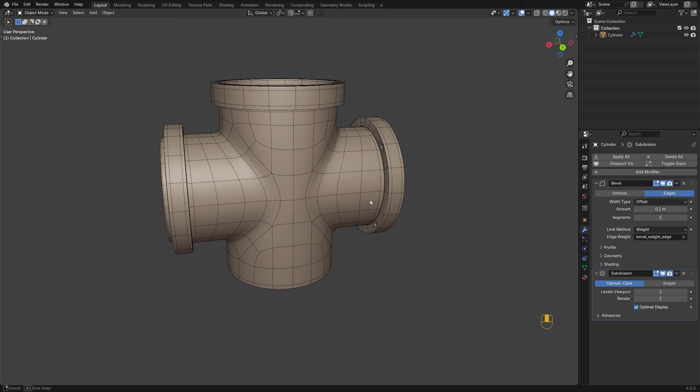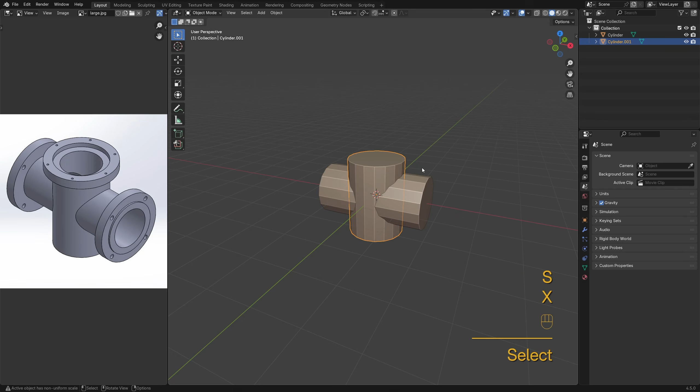In this video, we'll be making this cross pipe in Blender. Add 2 cylinders to block out the basic shape. Make sure the vertex count is a multiple of the number of holes. Insert edge loops to even out the quads before using a boolean to join the 2 meshes.

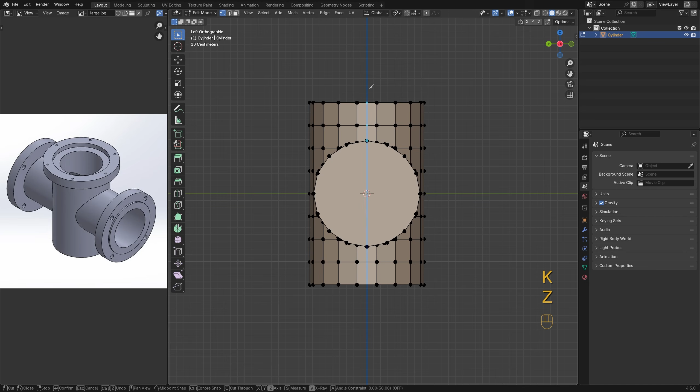The T-pipe is symmetrical on all 3 axes, so I'll focus on this base unit and mirror it to build the rest. Here I'll redirect the edge flow by manually cutting in new lines, merging extra verts, and dissolving any edges we don't need.

Got 2 triangles side by side, just cut right between them and collapse the edge. That usually cleans it up perfectly.

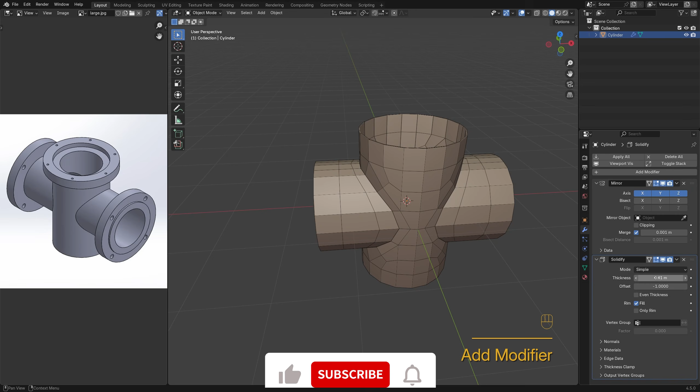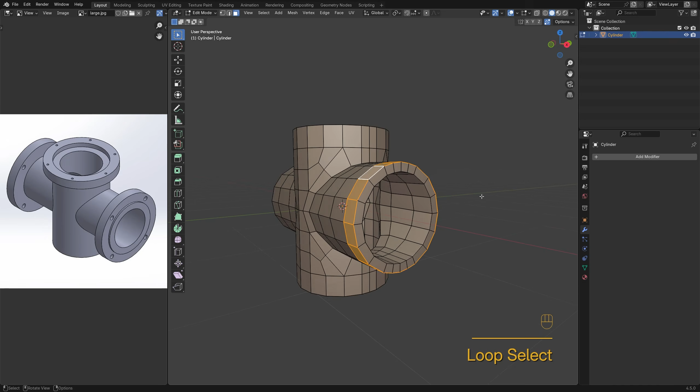Now mirror it in all directions to restore the pipe, then add a solidify modifier to give it some thickness. I'll extrude this face loop out a bit to build up that flange section.

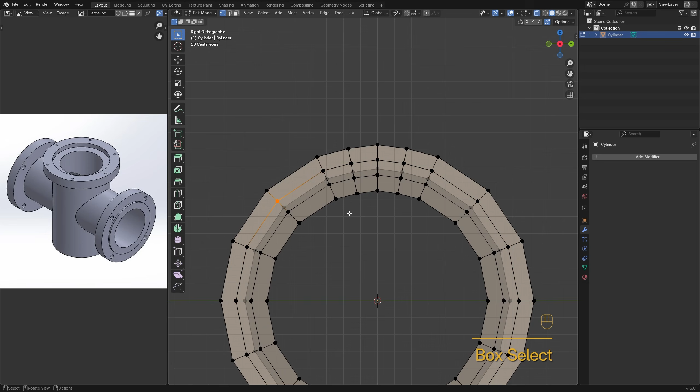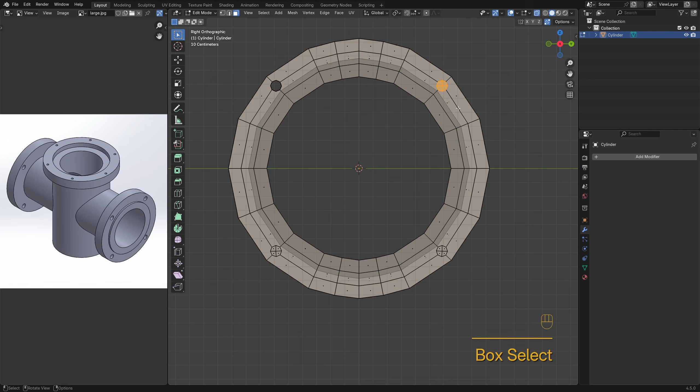Bevel the vertices with 2 segments, then use loop tools circle to round them up. Now bridge the 2 circles at the front and back. That'll punch a hole right through. Hit Shift R to repeat it. Just symmetrize it right to left and double-check the mirror axis.

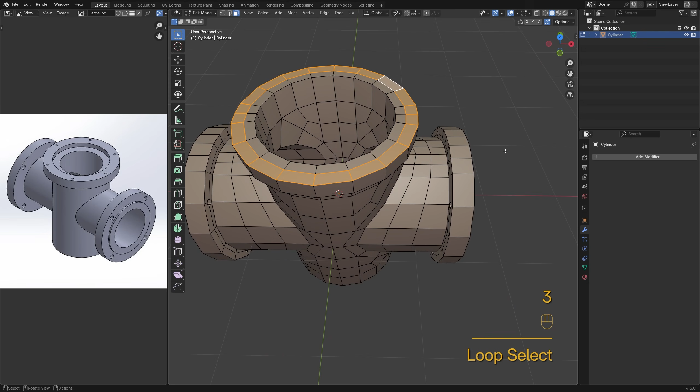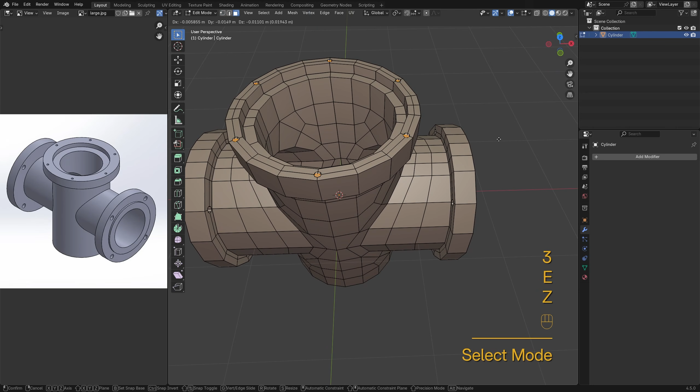The flange at the top is pretty much the same process as before. Now the mesh is done, it's time to mark sharp edges. I usually go with 60, which works well here. Don't forget to clean up your selections before moving on.

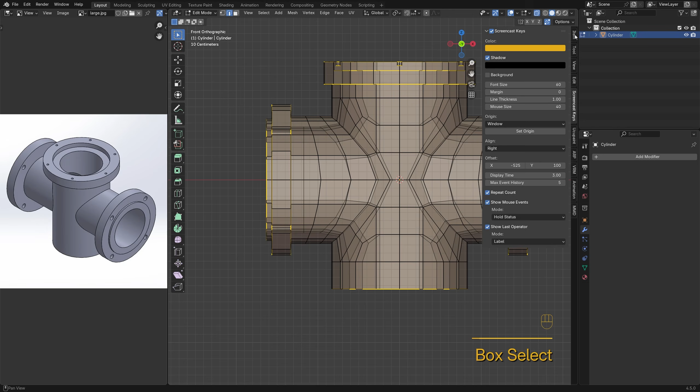With the edges selected, set bevel weight to 1. Then add a bevel modifier and switch the limit to weight. Now only those marked lines will be beveled.

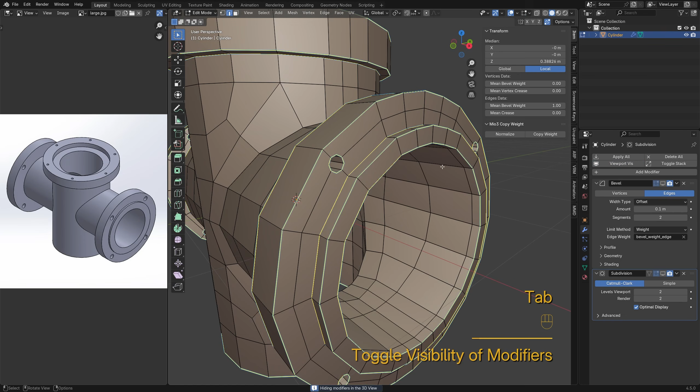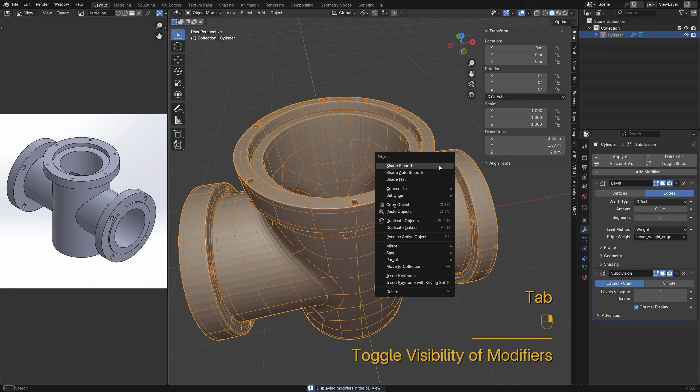The shading is a bit off here. Let's fix it. Select faces with the same sides. Press Ctrl-T to triangulate, then Alt-J to revert to quads. Done. That's it for this tutorial.